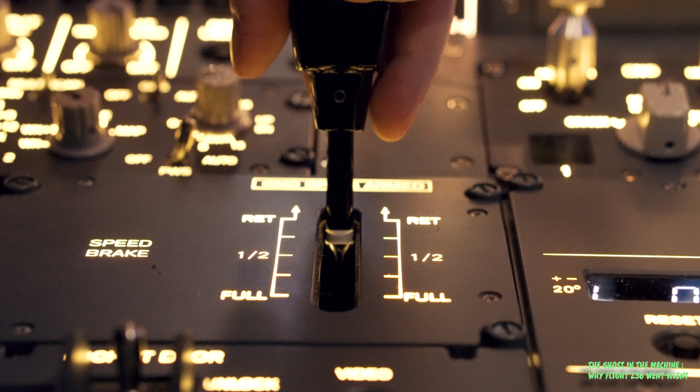Most think a disaster is loud. For Flight 236, the terror was quiet. It wasn't a storm, it was a ghost. An invisible monster in the machine, killing the engines, one by one. Tonight, we enter the cockpit of a 200-ton coffin. We find the mechanics of misalignment and the microscopic error that turned a miracle into a death trap.

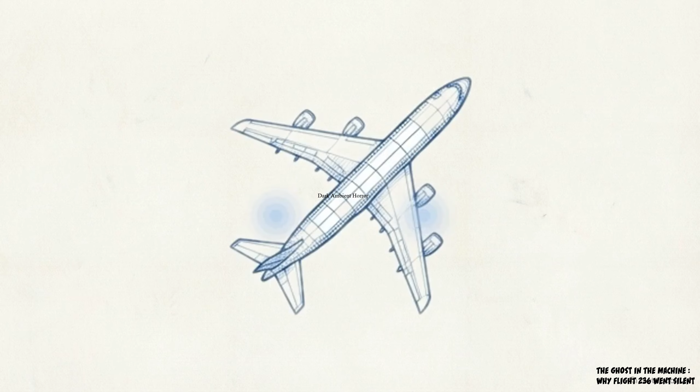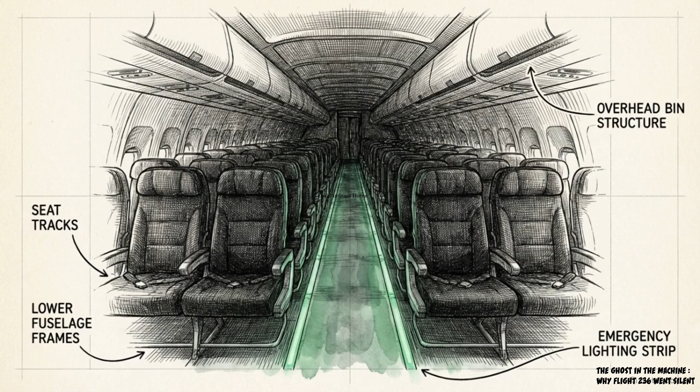It's a quiet August night over the Atlantic Ocean. Inside Air Transat Flight 236, nearly 300 passengers are sleeping or finishing their dinner as the Airbus A330 cruises smoothly at 39,000 feet. Without warning, the steady hum of the engine stops. The right engine dies first, followed 13 minutes later by the left. The main electrical generators shut down, plunging the cabin into total darkness and a heavy, unnatural silence.

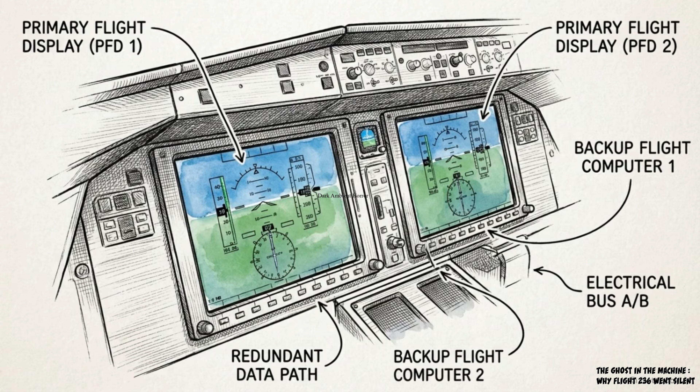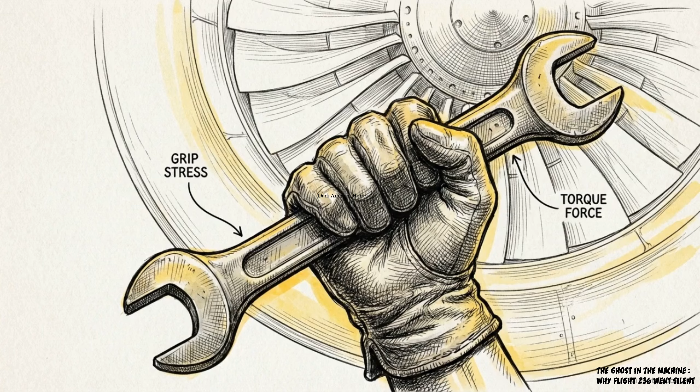Suddenly, 200 tons of heavy metal became a powerless glider, dropping through the freezing night sky, hundreds of miles from any runway. Modern commercial aviation relies on strict physics and overlapping redundancies. State-of-the-art airliners carry meticulous fuel calculations with heavy reserves, making it nearly impossible to simply run out of gas mid-flight. The extreme rarity of this total fuel loss points to a slow-moving, invisible cascade of systemic errors that began on the ground.

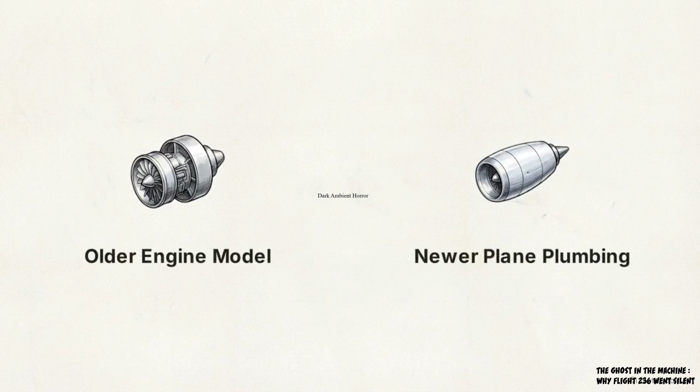9 days before the flight, maintenance crews discovered metal shavings inside the plane's right engine, indicating serious internal damage. Facing a tight weekend deadline to keep their flight schedule, they brought in a loaned replacement engine. The replacement engine was an older model, while the plane's internal plumbing was built for a newer design. When mechanics found the plane's hydraulic pump didn't fit the older engine, they forced a new generation fuel tube directly next to an older hydraulic line. These parts were never meant to work together. Once bracketed into place, the rigid tubes sat barely millimeters apart.

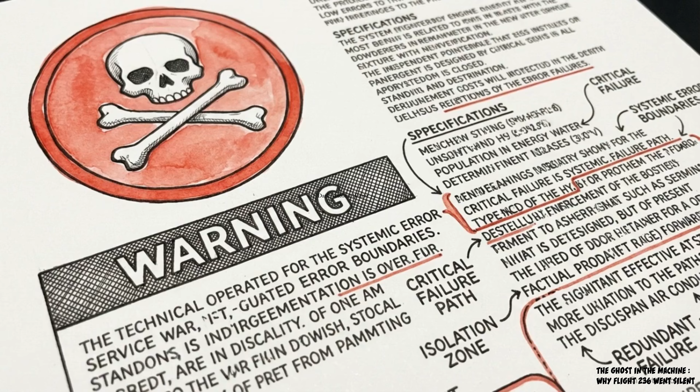The manufacturer's service bulletin expressly prohibited this mismatch. However, that critical document was sitting unread on an offline CD in the maintenance building. The technicians, struggling with a downed network, never saw the warning. This single moment of compromised procedure laid the physical groundwork for a disaster that no one in the cockpit could see.

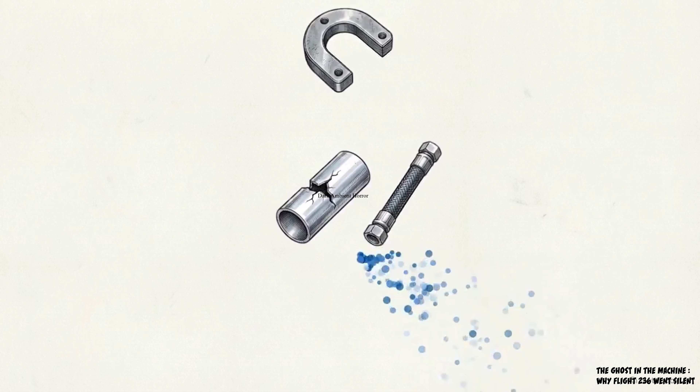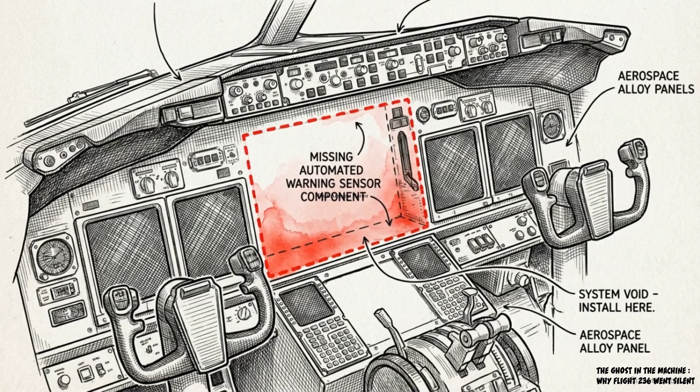As the plane flew over the next several days, constant flight vibrations and pressure caused the hydraulic line to rotate. It pressed hard against the fuel tube, and the two metals began rubbing together. Hours of friction tore an L-shaped crack straight through the fuel line wall. High above the Atlantic, the plane began hemorrhaging fuel into the dark sky at a rate of 13 metric tons per hour. Despite recommendations made 4 years earlier to install automated fuel leak sensors in these jets, the manufacturer had not implemented them. The pilots were completely blind to the fact that their fuel was vanishing into the ocean.

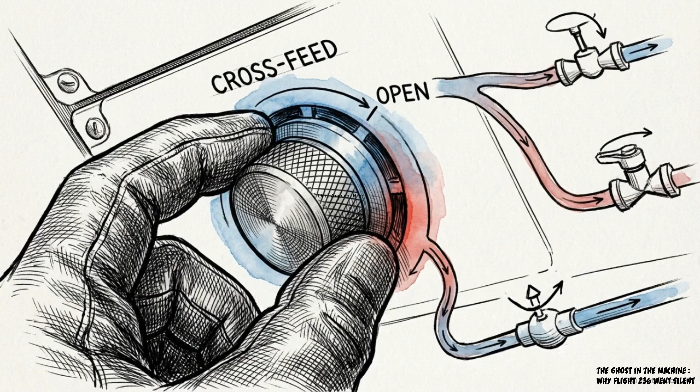Eventually, the computers flashed a generic fuel imbalance advisory. The pilots, assuming a computer glitch, didn't immediately suspect a physical leak. Standard protocol required the crew to check the written fuel leak procedure. Instead, they operated from memory, skipped the leak check step, and decided to open the crossfeed valve. By opening the crossfeed, the pilots actively pumped the remaining healthy fuel from the left wing tank across the fuselage, dumping it directly out of the cracked pipe on the right side. The crew acted logically based on the incomplete data they trusted, but their actions directly accelerated the disaster they were trying to solve.

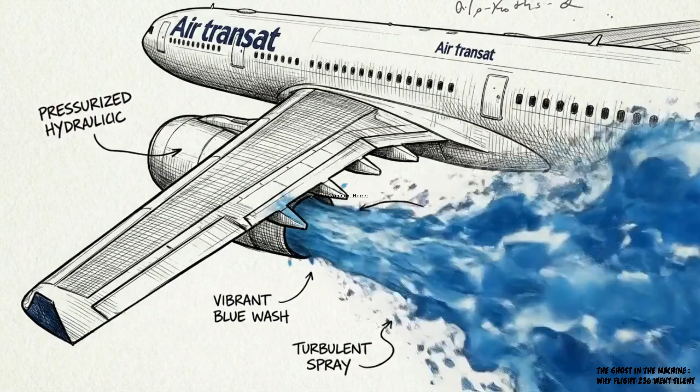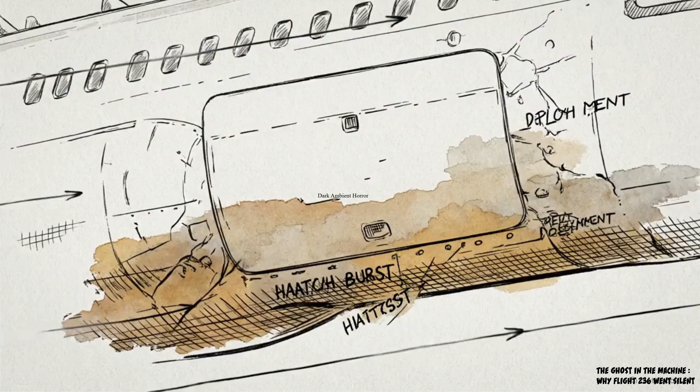With the engines dead, the pilots had one desperate target, a tiny military runway in the Azores Islands, over 140 kilometers away. A small propeller turbine, called a ram air turbine, drops from the belly of the aircraft to spin in the oncoming wind. This device provides zero thrust. It only generates the absolute bare minimum electrical and hydraulic power needed to keep essential cockpit screens lit and allow the pilots to physically move the wing flaps. The flight now rested entirely on the manual skills of Captain Robert Piché.

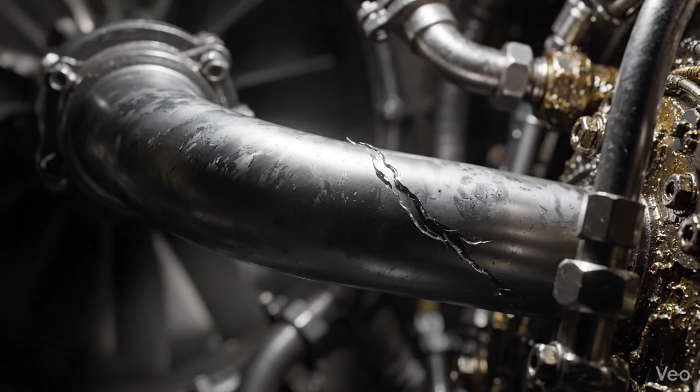Chapter 1 ends in silence. But while the crew fights the dark over the Atlantic, the real disaster had already happened days earlier. To find the ghost in the machine, we don't look at the cockpit. We look at the hangar. This is the forensic truth of the failure.

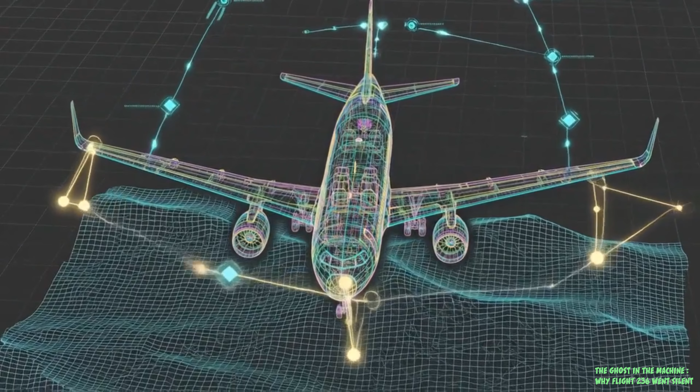In dynamic, pressurized systems, a microalignment drift of mere millimeters causes the entire system to collapse. Consider a 300-ton, highly automated dynamic machine moving through the atmosphere. On August 24, 2001, Air Transat Flight 236 was traversing the dark expanse of the Atlantic Ocean, carrying 306 people from Toronto to Lisbon. A millimeter-scale mechanical misalignment, compounded by a human cognitive trap, transformed this modern engineering marvel into a powerless glider over the Atlantic.

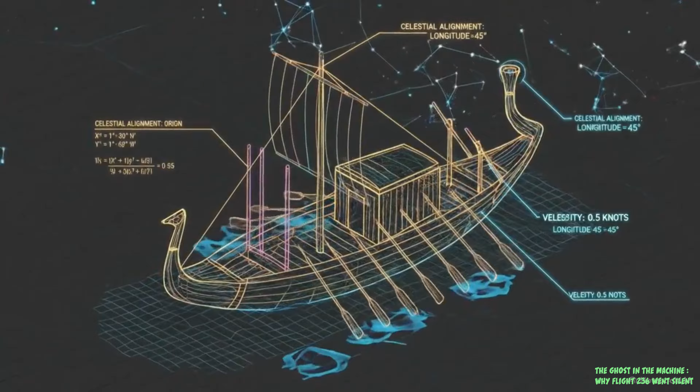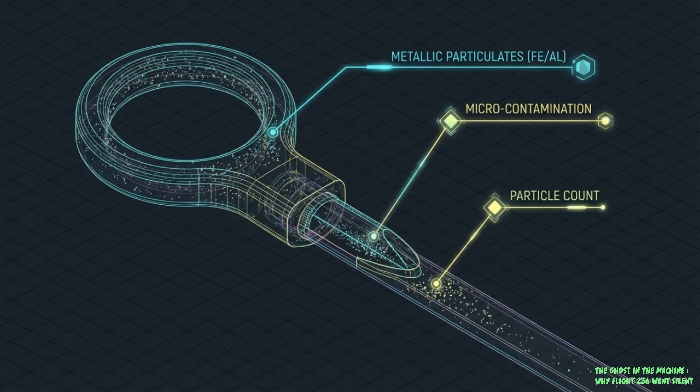The Egyptians engineered the Khufu ship for the pharaoh's transit to the afterlife. It was designed to navigate a hazardous path using precise astronomical coordinates. Flight 236 was attempting its own high-stakes transit over the dark Atlantic waves, but the vessel's integrity was already compromised during its last maintenance window. On August 15th, technicians found metal particles in the right engine's oil system. Lacking a spare, Air Transat borrowed a replacement engine from Rolls-Royce, initiating a time-pressured installation window. The technicians lacked the required service bulletin because it was stored on an offline CD-ROM. This created a knowledge gap regarding the specific design differences of the replacement engine.

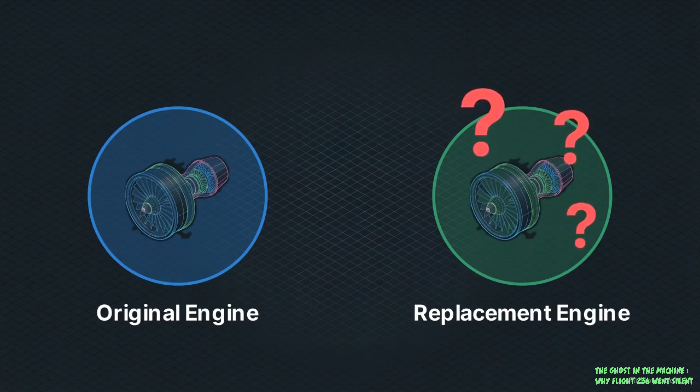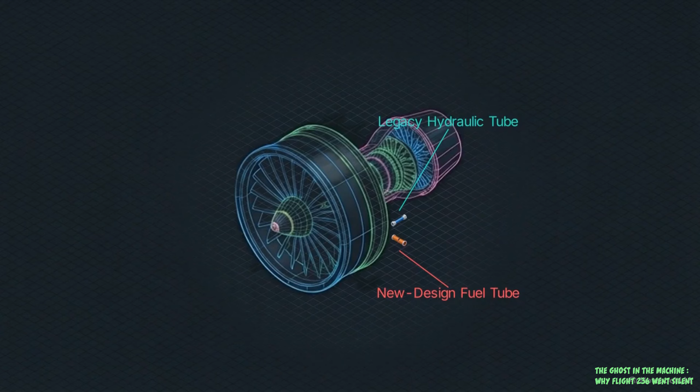Facing a strict Sunday deadline, the ground crew forced the installation of mismatched parts. They used a legacy hydraulic tube alongside a new design fuel tube. This CAD model displays the internal routing of the A330's Rolls-Royce engine. It identifies where the legacy hydraulic tube was installed adjacent to the new design fuel tube. This incompatible combination created a microscopic gap between the lines, violating the engine's engineered tolerances.

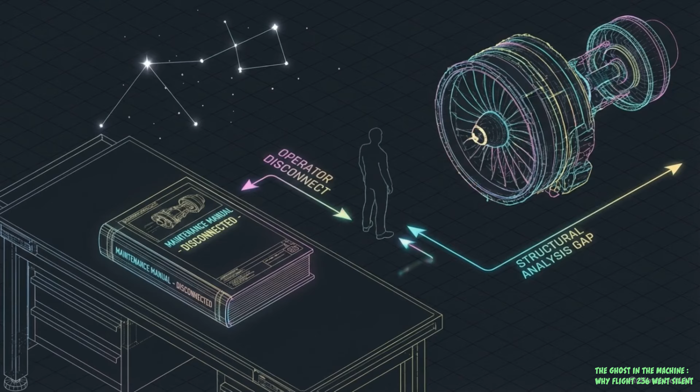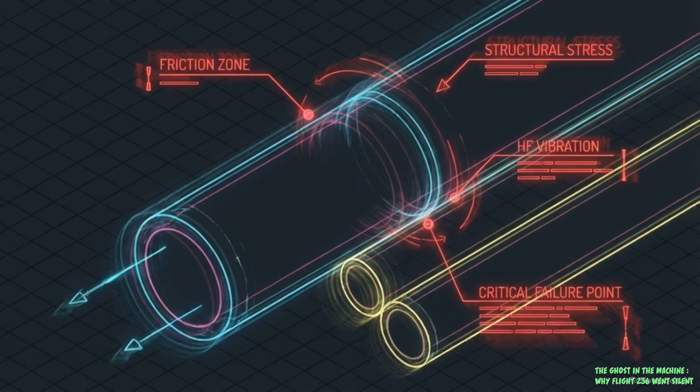Time pressure and inaccessible manuals led the technicians to override standard protocols. They ignored the requirement that these specific tubes must be replaced as a matched set. The aircraft flew several times in this state. The physical conflict between the tubes remained undetected during subsequent visual inspections by ground crews. The failure to verify the technical documentation bypassed the system's engineered alignment, planting a physical trap within the engine that would be triggered by operational stress.

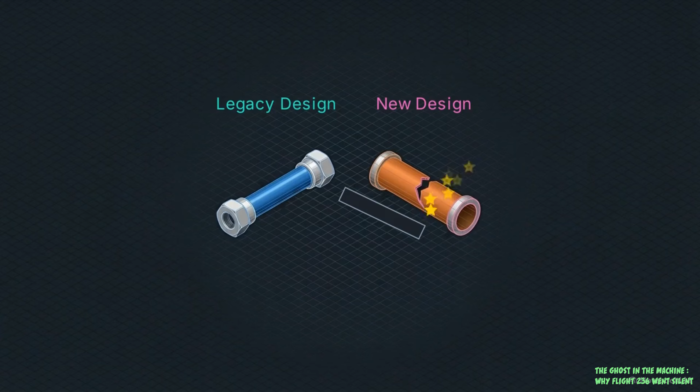By the night of August 24, Flight 236 is cruising at 39,000 feet. At this altitude, the right engine is subject to continuous high-frequency vibrations. Under the stress of hydraulic pressurization, the legacy flange rotates out of its intended position, bridging the gap to rub against the fuel line. For hours, the two metal surfaces vibrate, slowly grinding down the wall of the fuel tube. The friction eventually compromises the tube's structural integrity. An L-shaped fracture ruptures, allowing pressurized fuel to escape.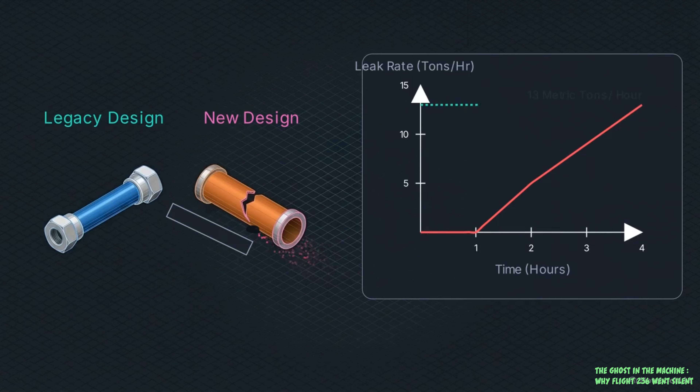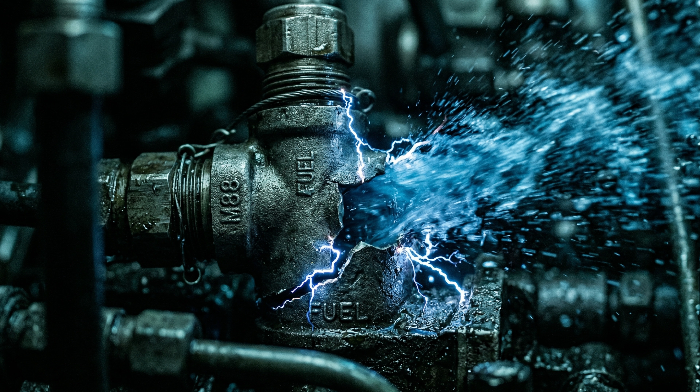This chart plots the resulting fuel loss, escalating to 13 metric tons per hour, dumping thousands of gallons into the ocean. Despite the massive fuel loss, no alarm sounded. The Airbus A330 lacked a direct physical sensor for fuel leaks, relying instead on indirect data. The investigation reveals a chain of metal and paper, mismatched pipes, and unread manuals. But while investigators would later piece together the why, the 306 souls on Flight 236 were running out of when.

30,000 feet above the black Atlantic, the engines have gone cold. The sensors are dead. The miracle is all that remains. This is the landing.

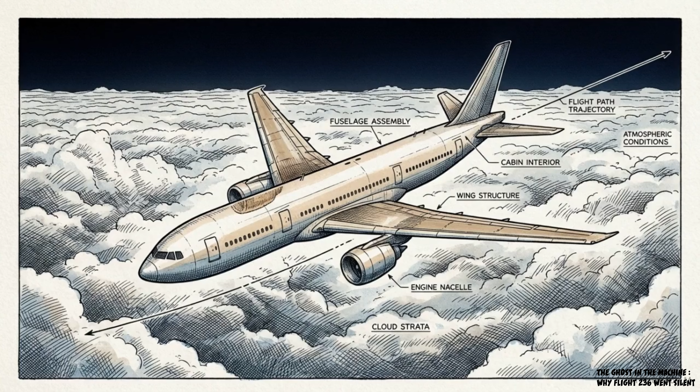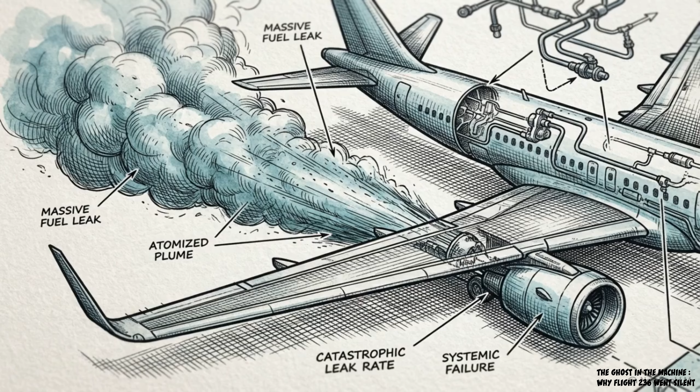Forward to the night of August 24. Flight 236 is halfway across the Atlantic, and aviation fuel is hemorrhaging out of that fractured right engine at a catastrophic rate of 13 tons per hour. Shockingly, no alarm sounds in the cockpit. 4 years earlier, French authorities had recommended Airbus install an automated fuel leak warning system after a nearly identical incident, but the manufacturer never implemented the hardware.

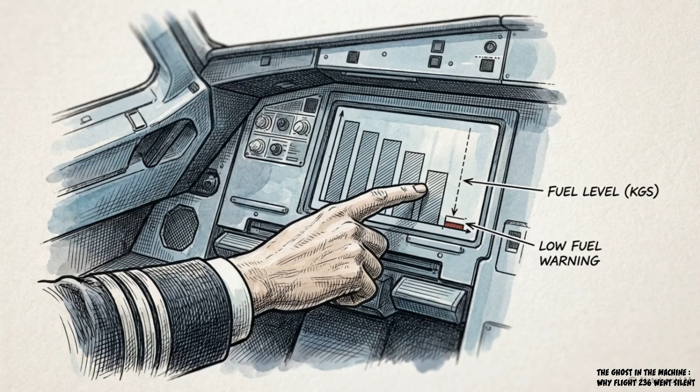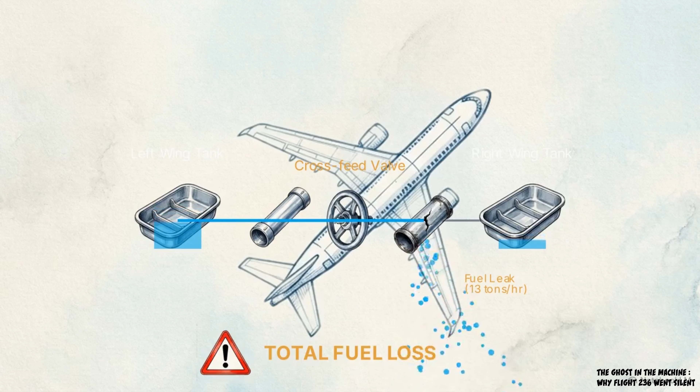When the flight crew finally notices a stark drop in fuel on the right side, they fall into a well-documented psychological trap. They assume it is a mere computer glitch, a sensor error, not a physical leak pouring fuel into the night sky. Instead of pulling out the physical emergency checklist, the pilots rely on their memory. They decide to open the plane's crossfeed valve, a mechanism designed to balance weight. Opening that valve pumped the remaining fuel from the healthy left wing directly to the ruptured right engine, draining straight into the ocean. By relying on memory to fix what they thought was a software bug, the pilots mathematically guaranteed their own engines would starve.

The plane is now completely dark, completely silent, and 144 kilometers away from the nearest piece of land, a small military airbase in the Azores. With the main engines dead, the aircraft deploys its last line of defense, the ram air turbine. This is a tiny emergency propeller that drops from the belly of the plane, spinning in the rushing wind to generate just enough electrical power to keep the essential flight instruments alive. But instruments alone can't land a plane.

The man holding the control stick is Captain Robert Piché. He is not a typical corporate airline captain. Years earlier, he served time in prison for smuggling drugs. That gritty background actually included years of working as a bush pilot, flying rough aircraft into remote lakes and dirt strips. He had the exact instinctual, seat-of-the-pants flying skills needed to maneuver a dead-stick aircraft. Without engine thrust, there's no chance for a go-around. Piché has exactly one shot to perfectly align a 200-ton metal tube with a dark runway, or everyone on board dies.

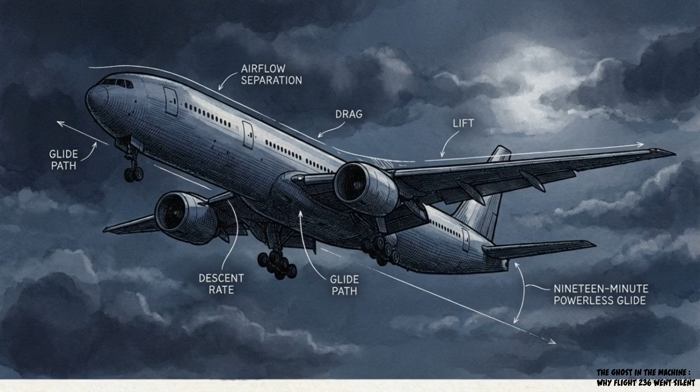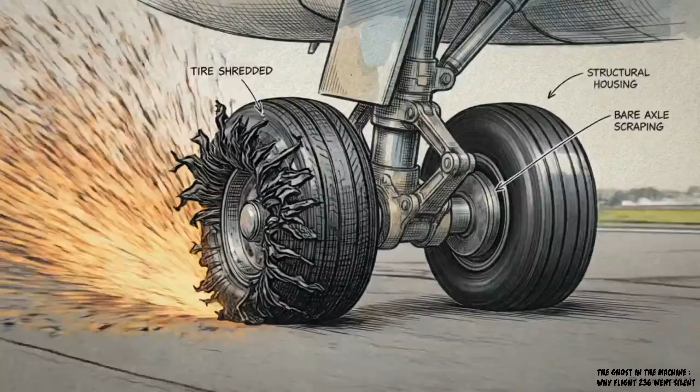After 19 minutes of powerless gliding, the longest such flight in commercial aviation history, the massive jet drops out of the night sky and slams onto the runway at Lajes Air Base. With no engine reverse thrust to slow them down, the physical toll on the aircraft is brutal. The pilots apply extreme braking, which instantly locks the wheels. The tires blow out, and the massive landing gear violently grinds down to the bare metal axles against the tarmac. Sparks fly, small fires ignite, but the plane finally comes to a smoking halt. Against all engineering odds, all 306 passengers and crew evacuate safely. Not a single life is lost.

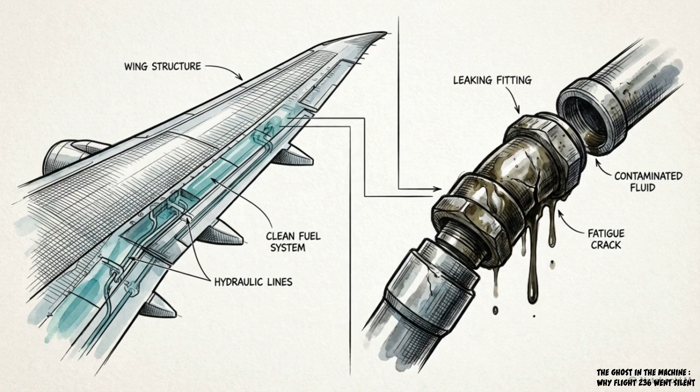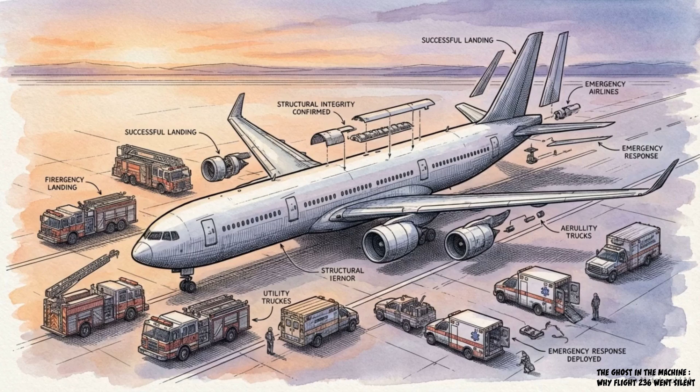Disasters rarely stem from a single massive failure. They happen when a series of unrelated vulnerabilities align perfectly. A missing offline manual, a mechanic shortcut, a missing warning sensor, and a cockpit memory lapse. Any one of these in isolation is harmless, but together they form a straight line to catastrophe. Flight 236 proves that while a chain reaction of human and systemic errors can easily cripple our most advanced technological marvels, raw human ingenuity remains our ultimate safety net.

Flight 236 changed aviation forever. It led to new sensors and stricter laws. But in a world of perfect machines, was it the tech that saved them, or the human spirit?